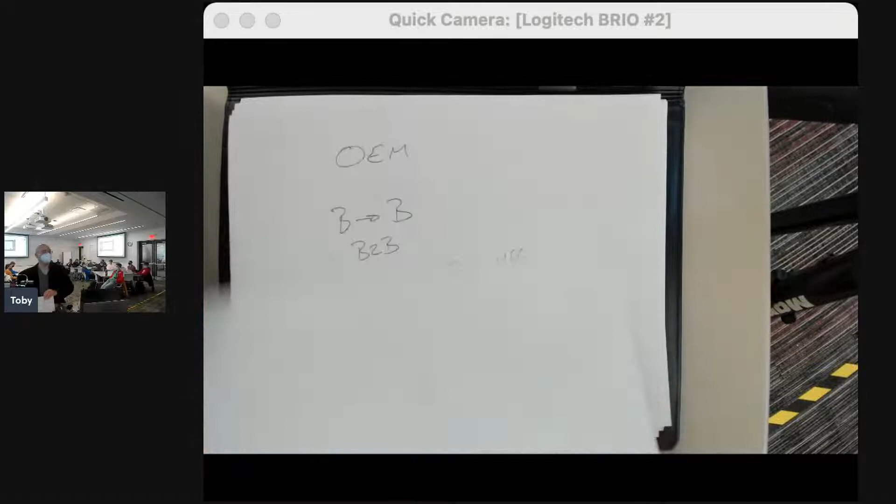All right, you guys can see what I'm writing now, sort of, and you can see if anybody makes a comment. I probably should start with clean paper. Okay, what was I talking about? Now I'm all confused. Yes.

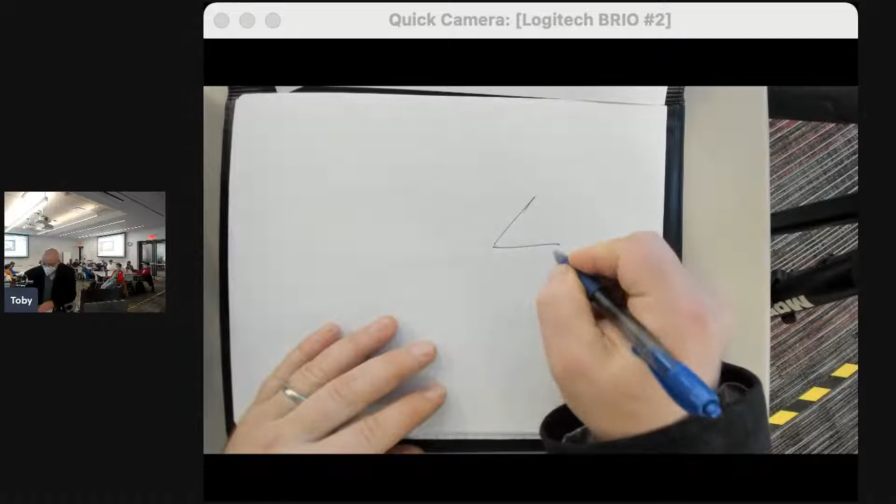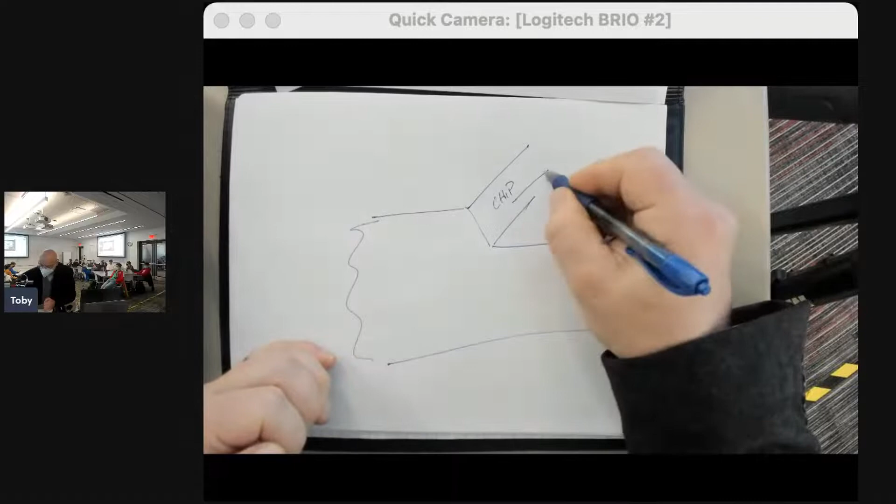Orientation of the workpiece in the lathe. Okay, so I've got my cutting tool, right? I showed the cutting tool, I've got the workpiece. The chip is going up like that, so the chip is moving that way, the workpiece is moving that way.

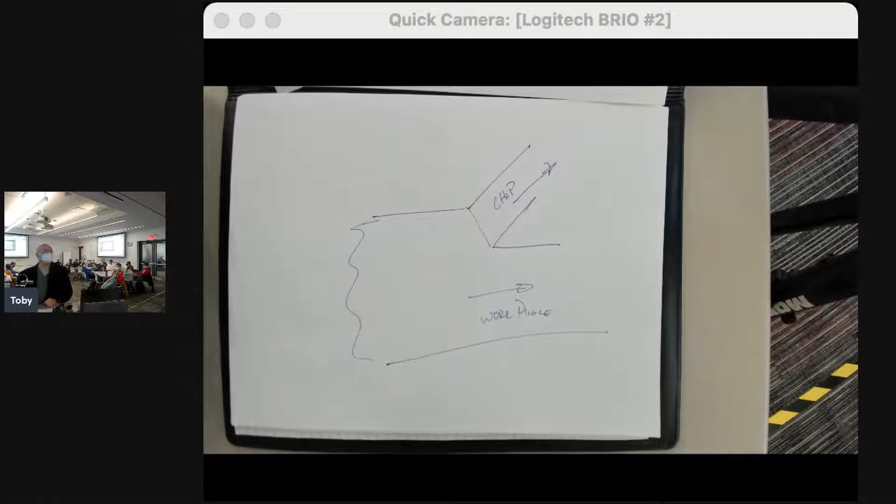Can you guys see any of that? Okay, maybe I'll try to zoom in a little bit. There, zoomed in a little bit. All right, so the workpiece is moving this way, the tool is here.

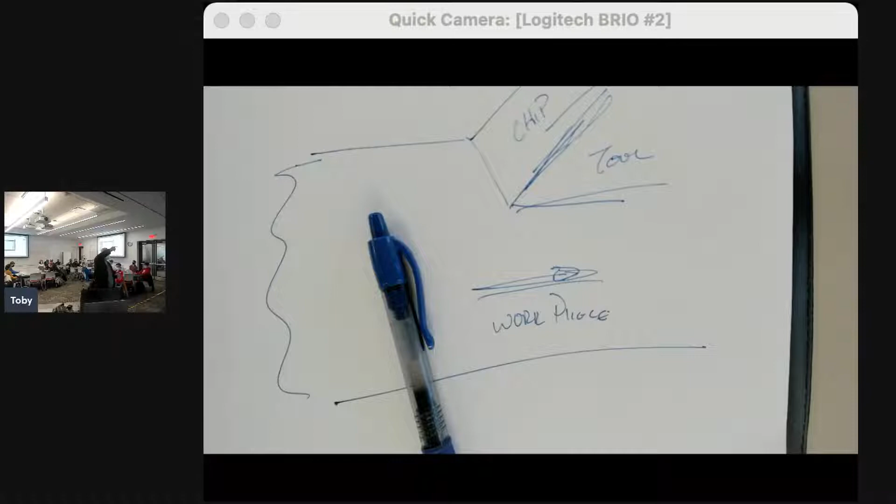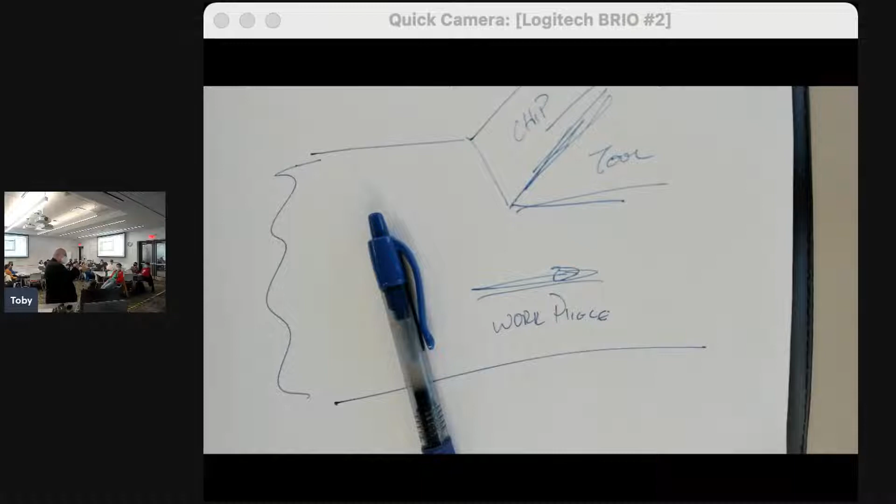So what moves in the lathe? Yep, the workpiece moves in the spindle, and the workpiece spins around in the spindle like this. So the tool moves too, right? It moves in and out to make different diameters, and it moves along the z-axis to make different lengths. So it moves in and out in the x direction, and left and right in the z direction.

So the tool moves too, but the cutting happens because of the rotation of the workpiece. The workpiece rotates around and comes in contact with the tool, the chip forms and slides along the edge of the tool.

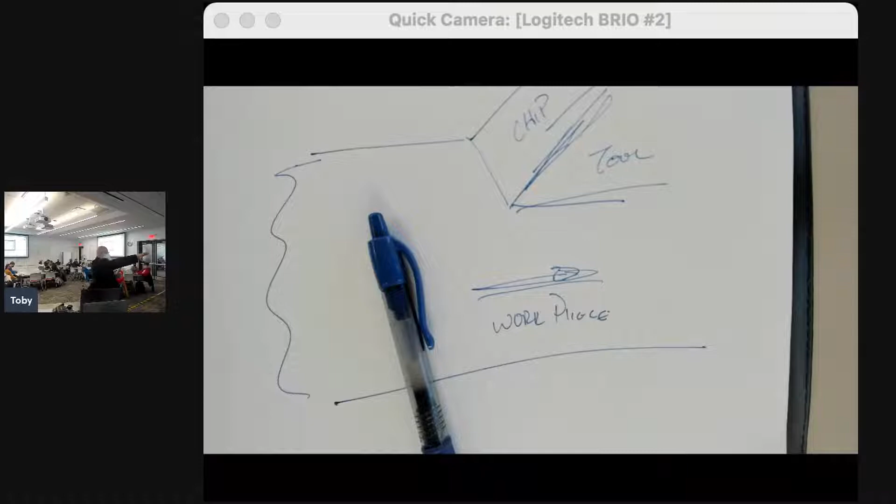And then you move the tool over when the tool moves, right? Now there's a new bit of workpiece that's going to come along, make a chip, and slide along the edge of the tool.

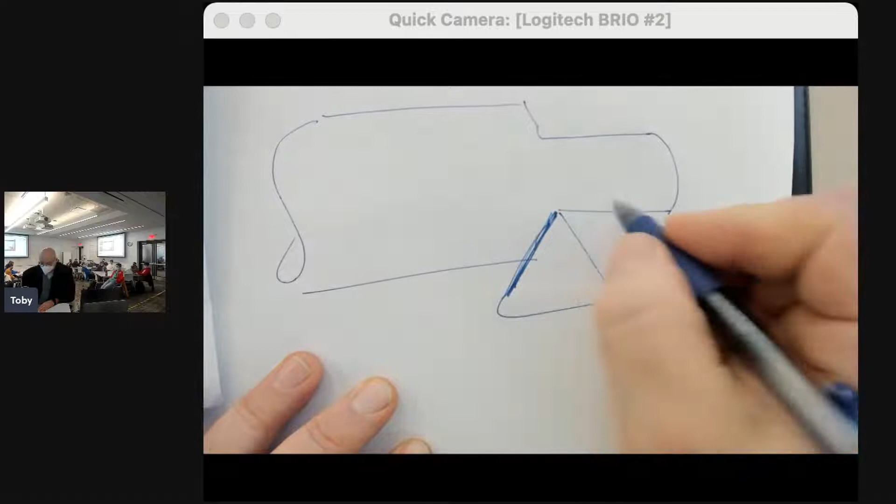So if you think about that, if you've got your round workpiece here, and you've got a tool like this. In this picture, this point right there, we're looking down the edge of that point, which is this edge of the tool. The tool's feeding in this direction, and the workpiece is spinning in this direction. So for each revolution, the tool moves over a little bit. It's moving continuously, it doesn't stop and start, but for each revolution, the tool moves over a little bit, and the chip forms and flows off in that direction.

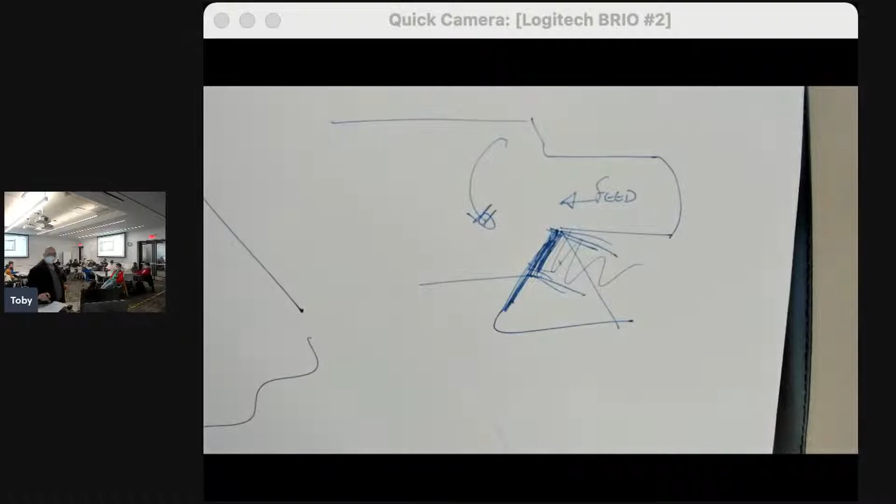So we do that in a turning operation. That's where the chip flows off, so the chip goes off like that. In this diagram, we're looking down the edge of the tool, and it's the rotation of the workpiece that's making this happen.

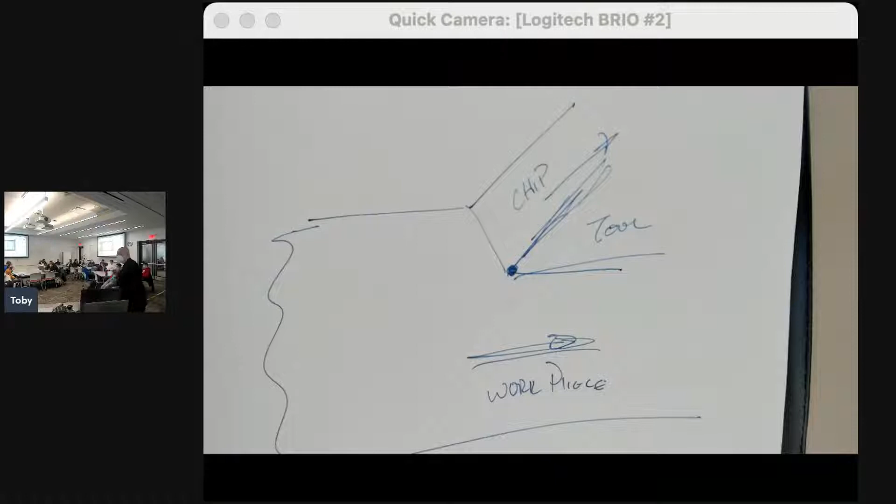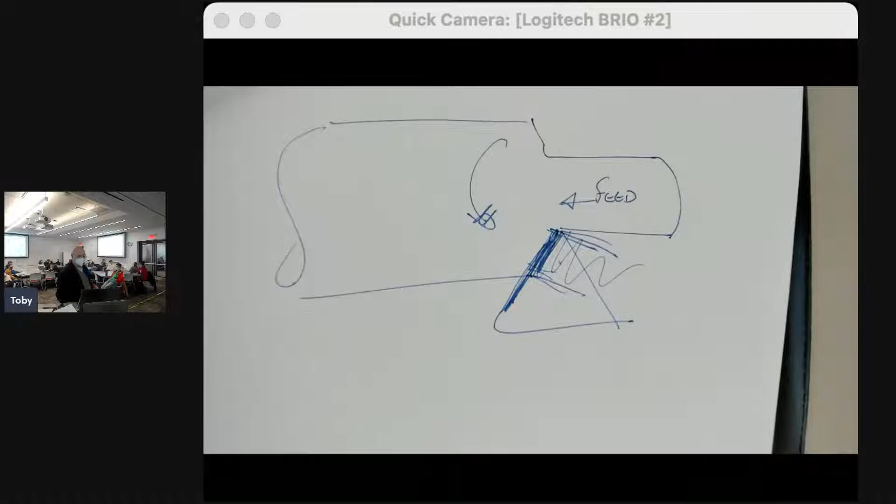So this is turning. What happens in milling? Not that one, this one. That view is better. It's exactly the same physics.

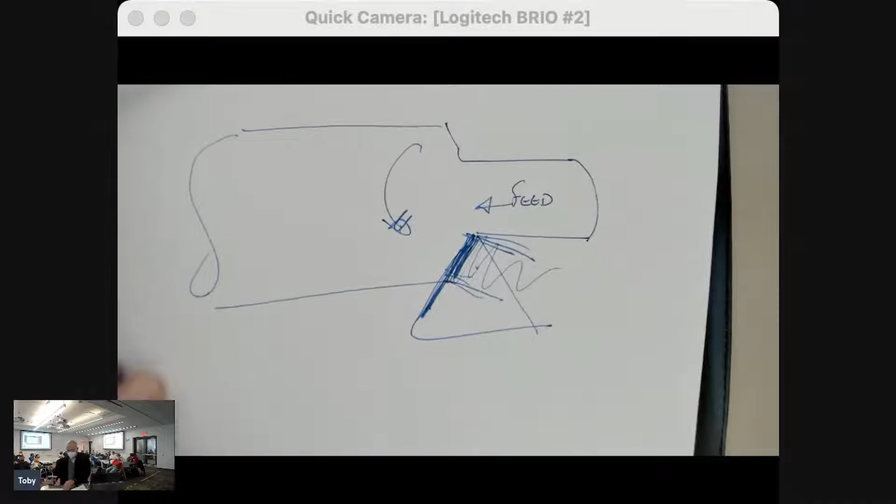So what's the cutting tool look like in milling? The tool is spinning, and the tool has these spiral flutes on it. If we looked at the end of it, it's got maybe 3 cutting edges on it. And so these edges spiral up the tool.

So where does the cutting happen? The cutting's happening either right on this bottom edge, if we're going down into the material, or it's happening as this spiraled flute moves sideways. So you could think of the rotating of the workpiece in the lathe as what makes the cutting happen. The rotating of the tool in the mill makes the cutting happen. It's the spindle rotating, in both cases, in the mill and the lathe, that makes the cutting happen.

The feeding in the lathe moves the tool over, so there's a new bit to cut when it spins around. The feeding in the mill moves the tool over, so there's a new bit to cut as it spins around. It's the same exact physics, just happening in a different spot inside the machine tool. It's a lot easier to mentally visualize the lathe one, right? Does that make sense? Turning in the lathe.

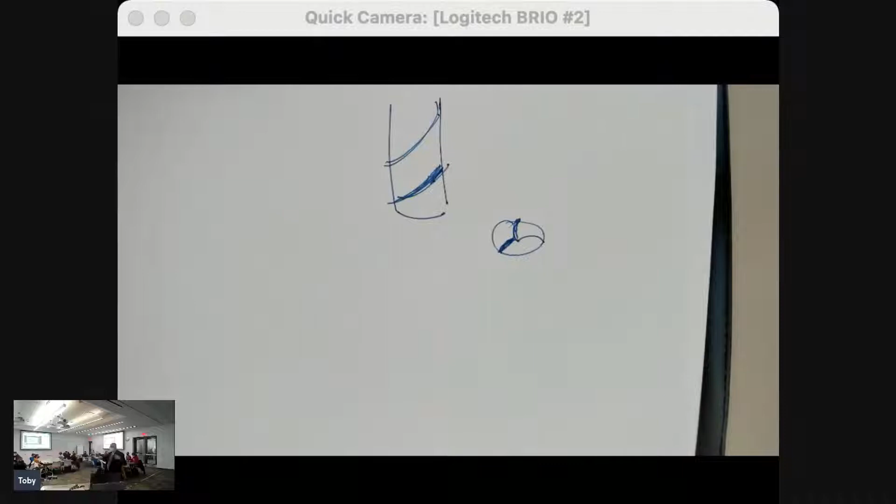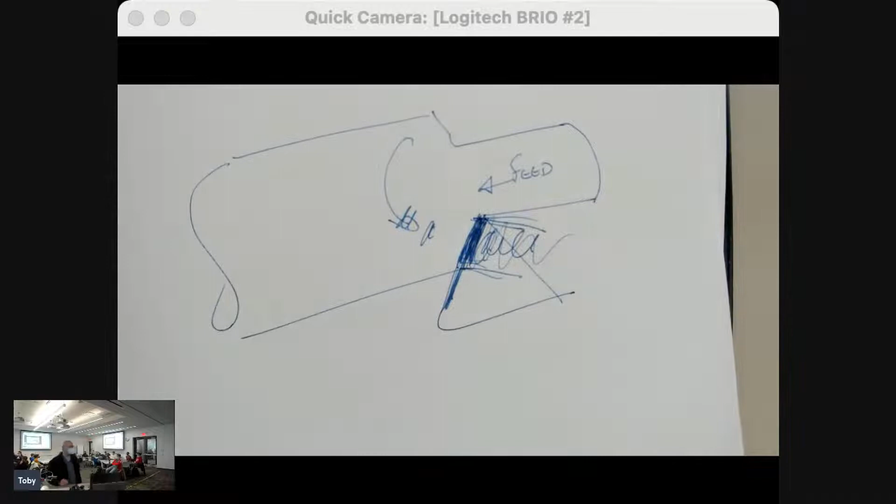Next week, we're going to talk about how we model these processes, especially if we look at this one. If you look here, where that chip is, it used to be workpiece material, and now it's chip. That spot where the transition is, there's a lot of energy there. It takes a lot to take metal and make it not be attached anymore. Who's ever broken a piece of metal or something? It takes some energy to do that, right?

Okay, so if I go back to the slides, let's see, stop screen share. Share, slides. No, I don't want to do that. Oh, that's cool, I didn't know I could do that. Next time, share, screen share, this, share. Now go to this page. All right, I think the people at home see the same thing we see.

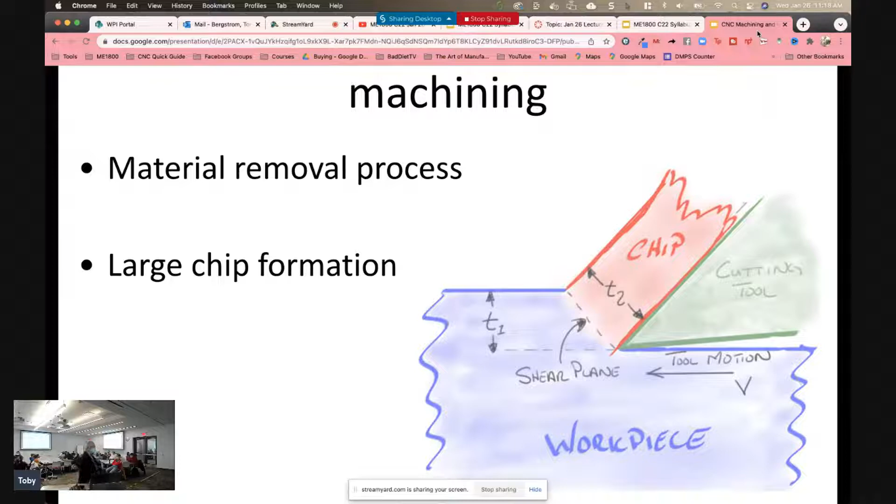If I go back to the slides here, let's take a look at relative motion, yeah. Here's the picture. Oh, this is a cool video. Let's watch the cool video.

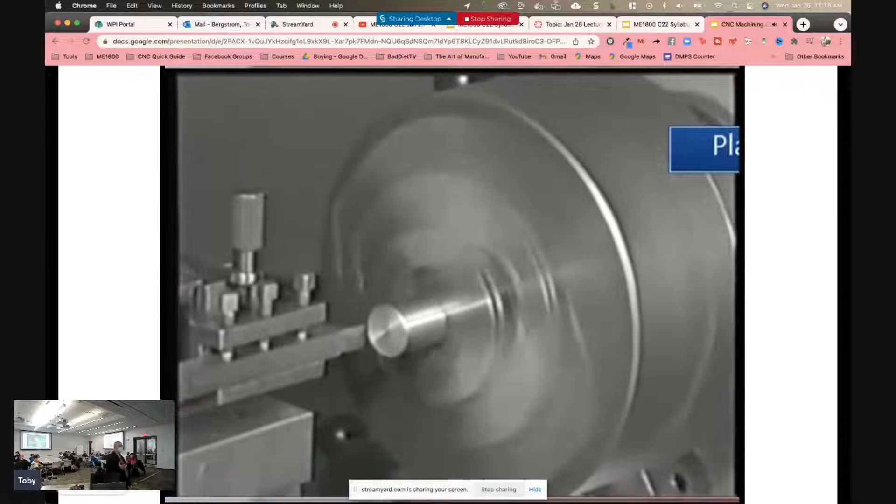Did you guys ever have videos to watch in school? Especially when you had a substitute teacher, they'd play the videos. Did they wheel in the cart with the TV on it? And then did they have DVDs? You had a VCR? So when I was in school, they wheeled in the movie projector, and you had to feed the movie film through the wheels and all that stuff to do this. So when this video was actually originally made, it was totally the movie projector kind.

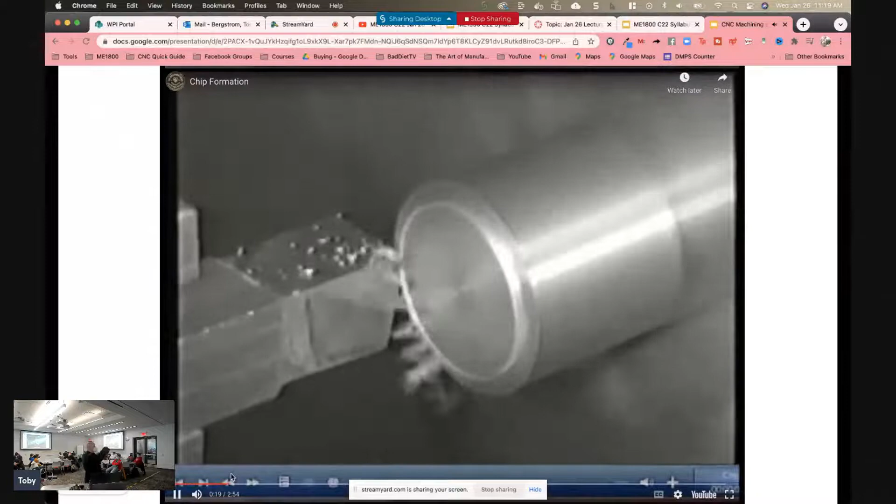Let me back up a little bit. So what we see here is a turning operation. You can see the turning operation. They're spinning the workpiece, they're moving the tool through the workpiece. Back up a little bit. Moving the tool through the workpiece and feeding across the front face of the part.

If you zoom in on that as it's happening, you can see that it's actually changing. You see the little boundaries between the dark and light stuff here. They're all scrunched up together in this part, and amorphous over here. So it's actually changing the structure of the material, the internal shape of the material as it does that cutting.

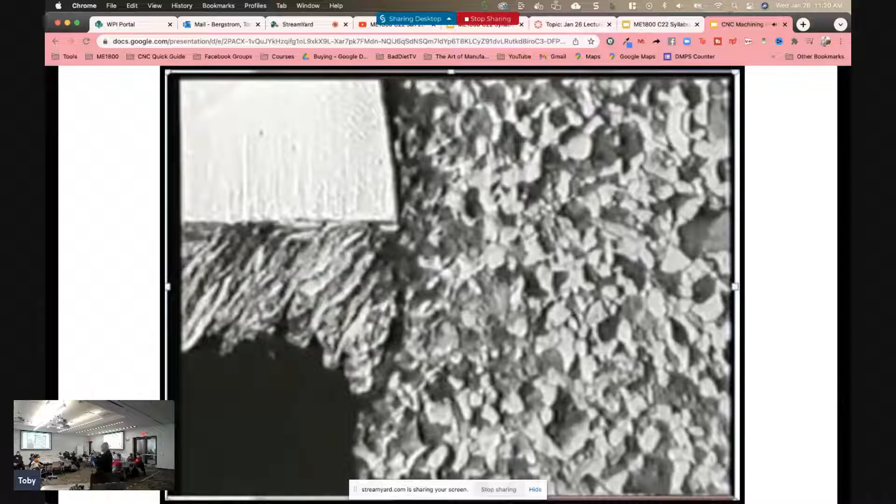This is my fancy animation. Check it out, I was very proud of that. I did that animation.

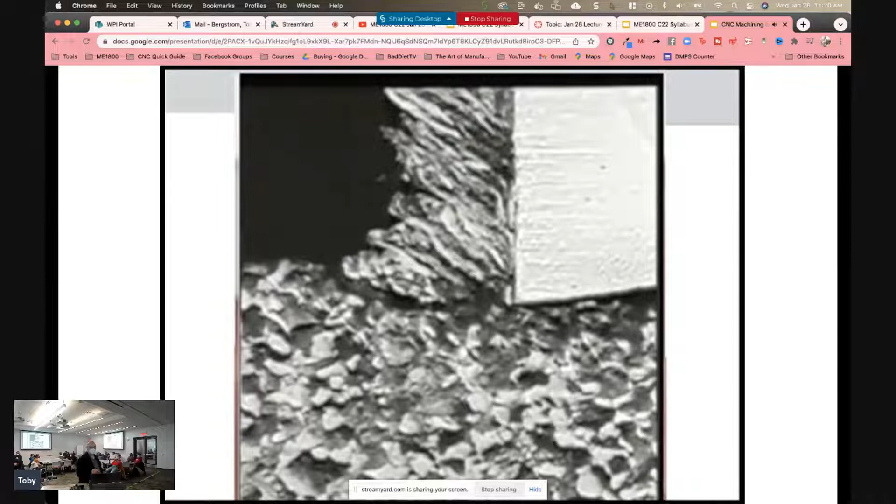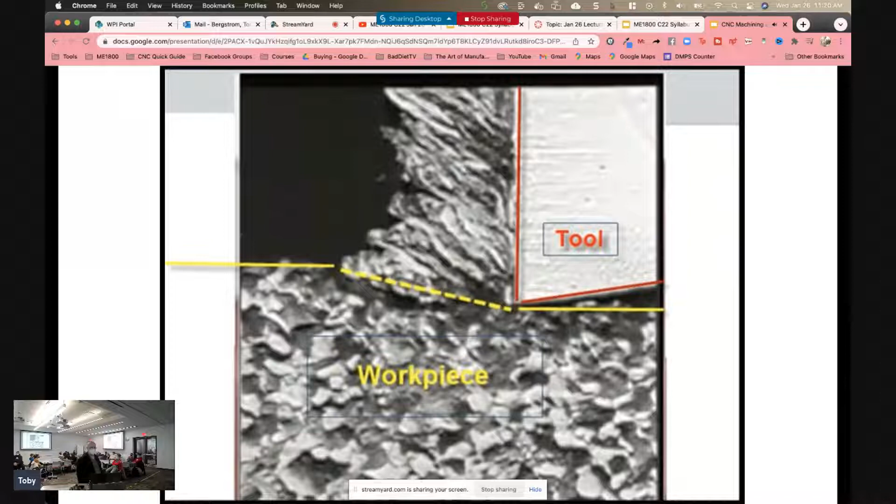And now it looks like the picture I drew on the paper. It's going to look more like it in just a second. Yeah, tool. So exciting. Oh man, it's too slow though. Workpiece. Yeah, chip. Oh come on, I don't know why this is so slow.

So that's all of machining. All machining is this process. Even sanding and grinding, it's this process just on a smaller scale.

On a lathe, you typically have one cutting edge. In a turning operation, there's typically one cutting edge. In a milling operation, there's typically 2 to 5 cutting edges, like the flutes on the end mills. A lot of the ones we use are 3 cutting edges. Sometimes we'll use a single flute cutter, especially for engraving or something. But there's usually a couple, a few cutting edges in milling.

In a grinding process, each little piece of grit on the sandpaper, for example, is a cutting tool. So there could be thousands of cutting edges in a grinding or sanding process each time it goes around. But the physics of what's happening is exactly the same.

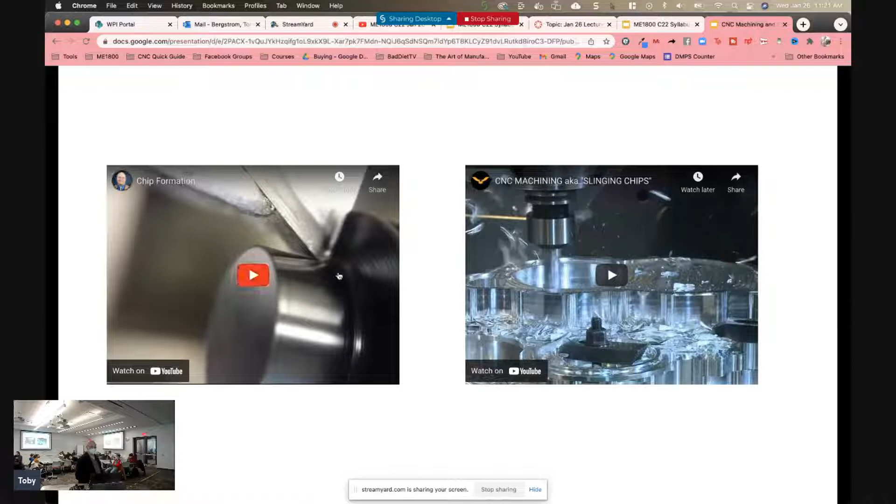All right, I think if I just hit the button it'll go to the next. Oh, check that out, it's amazing when technology works. All right, so this is our turning again, see if I open this up bigger. Oh no, I don't want to do that. I'm not logged in, wait why am I not logged in? Switch account. There, now there's no ads.

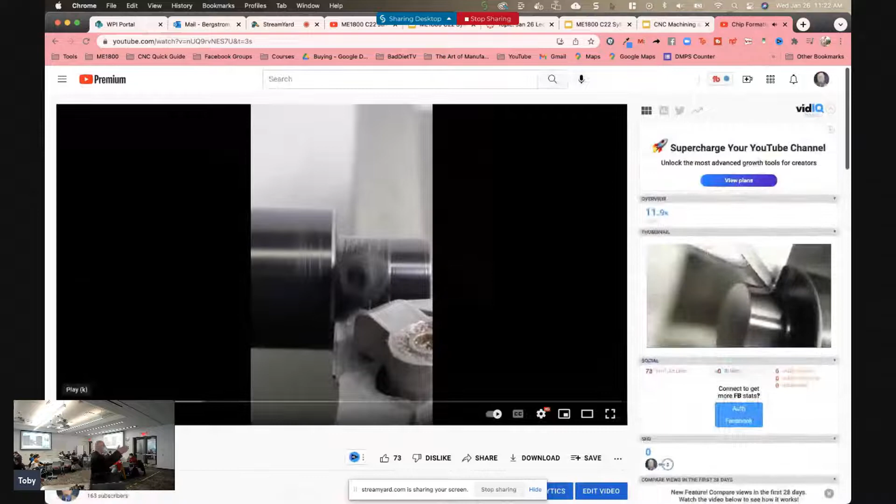All right, so this was our turning operation, right? In this case, we're turning the outside diameter of the workpiece instead of the face of the workpiece. In the other one, we were turning the face of the workpiece. Here we're turning the outside diameter of the workpiece.

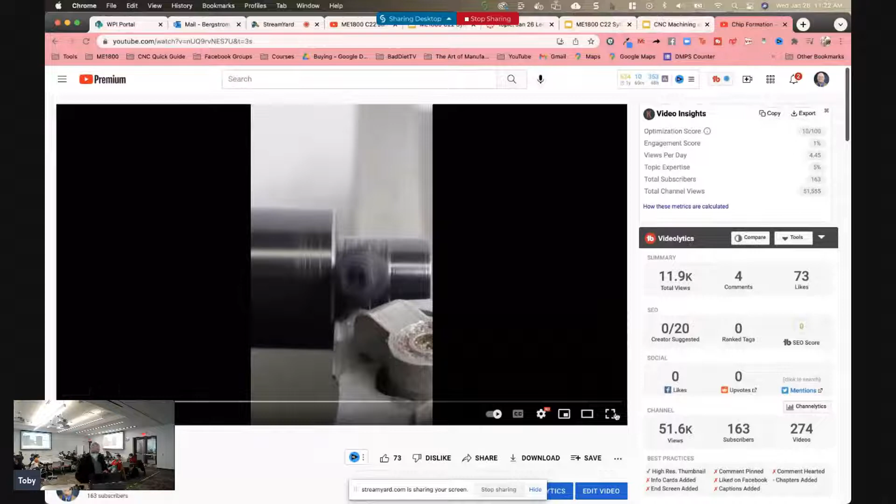So you see, as the workpiece comes around, it hits the edge of the tool, it forms that chip.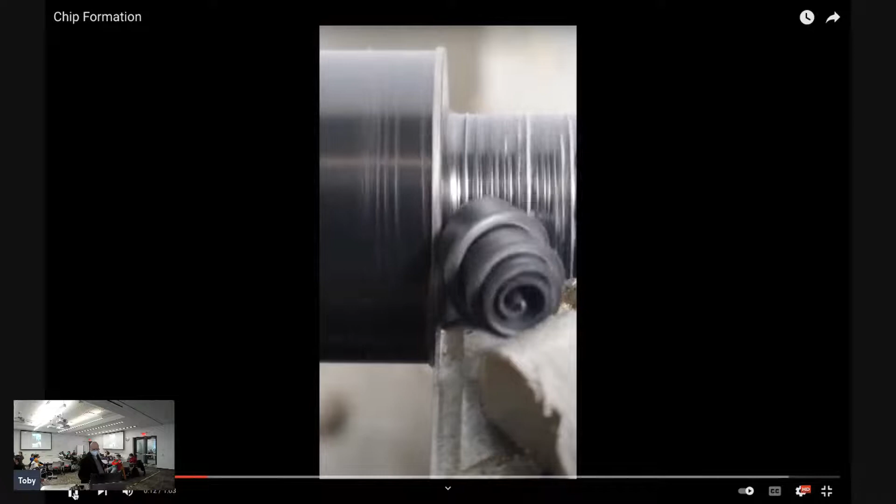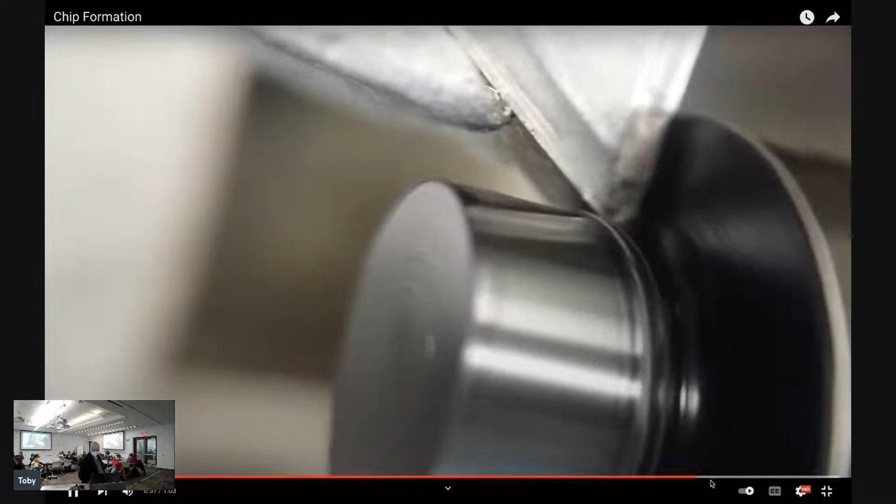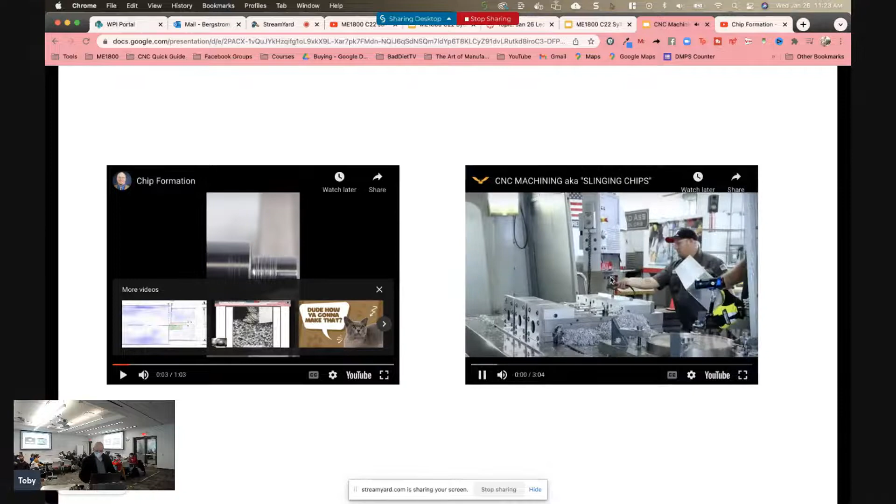And this is kind of boring, skip ahead, turn faster. Turn faster. I guess there's nothing exciting there. Come back over here, now here's a milling operation. All right, come on, I don't care about your stupid CGI stuff.

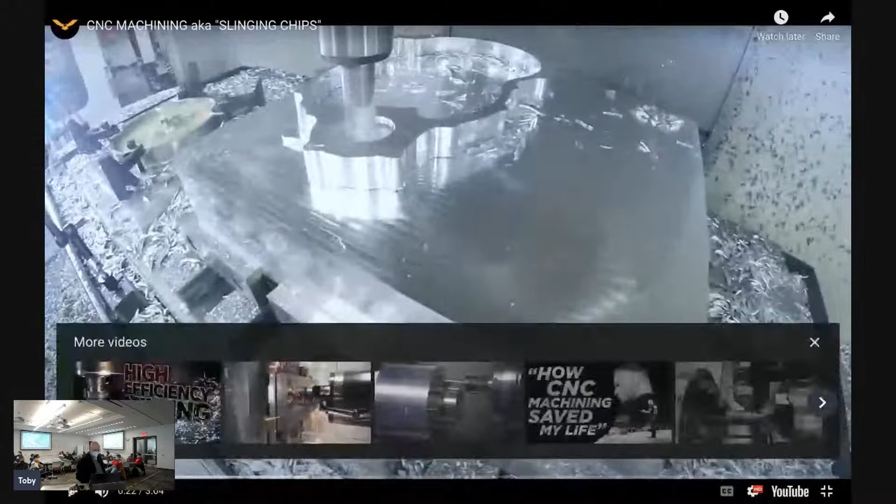All right, so what's today's topic? CNC machining, that was part of it, right? There were 2 parts to today's topic. What was the other part? We talked about machining, milling and turning is machining, right? What makes it CNC? Because it said CNC machining. What makes it CNC, yeah. Prototyping was the answer to the first question I asked, but I stepped back and asked a previous question. So CNC machining and prototyping is what today's about, but what makes the machining CNC instead of just machining?

It's controlled by a computer. It actually stands for Computer Numeric Control. Of course it uses numbers, that's what computers do, right? They actually add ones and zeros, that's what computers do, so of course it uses numbers.

Before we had computers directly controlling them, they invented this thing called Numeric Control, and it was NC machining. But it really was, you used a computer to create the steps for the program, and then they took these note card things and put holes in them at different locations. Then you could feed those cards into the machine tool, and it had a little computer inside that would read those cards that you fed in. Anybody ever seen a computer that worked on paper cards? Yeah, old school, right?

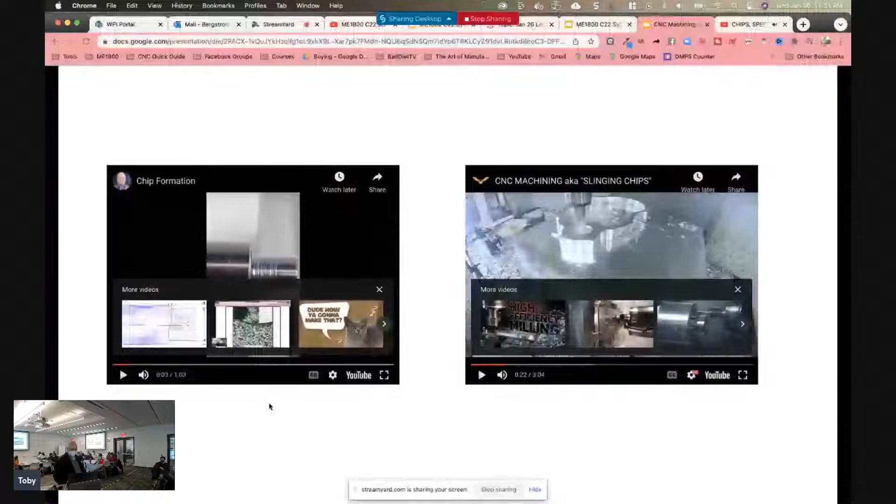Let me, is this going to work? If I switch back, I go here. And stop screen share, screen share, window, this one, share. And then make that one be in front.

Okay, so the things we talked about were setup and creating code, the size and shape and material. So I guess what is it? Size, shape, and material of the thing that you're making is going to determine which one is faster, right? So I think that this is true.

Especially with simple parts, I would say that it is way faster to 3D print the part if you don't know what you're doing. If you have to learn the steps, if you have to learn how to do the setup, and if you have to learn how to do the coding, the learning curve is shorter with 3D printing, as long as your 3D printer just works out of the box, right? I mean, I have personally never purchased a 3D printer that just worked out of the box, but that's because I allow students to influence my choices when I'm picking 3D printers.